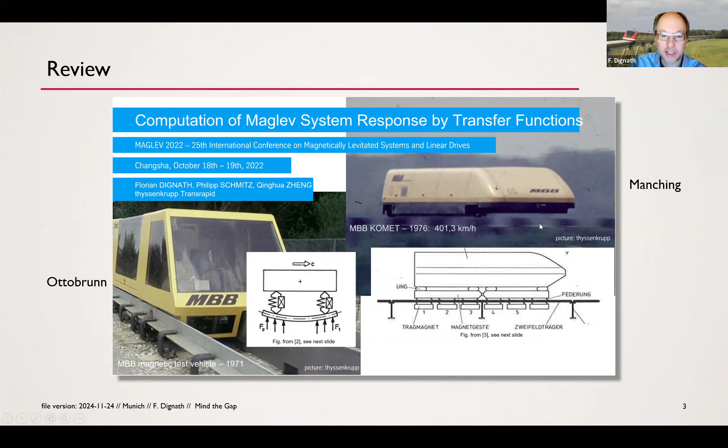So you see, in 1971 the first vehicle was levitated, and then in 76 they first reached high speeds. If you want to read more about this, I can recommend some publications. I wrote two on this slide, but in them you see many more citations. There are quite extensive publications available even nowadays where you can read how they built these systems and what difficulties they had to overcome.

You see some of the most important people from that time here. The most important person in this picture is Mrs. Gottzein, who came to MBB as an IT engineer for Mr. Bölkow and then became one of the most famous German professors, the first female to be awarded the Siemens ring, and known far beyond Germany as the mother of magnetic levitation. Professor Schiehlen was my professor in Stuttgart, and he covered the academic side of magnetic levitation. It's also in his book about vehicle dynamics.

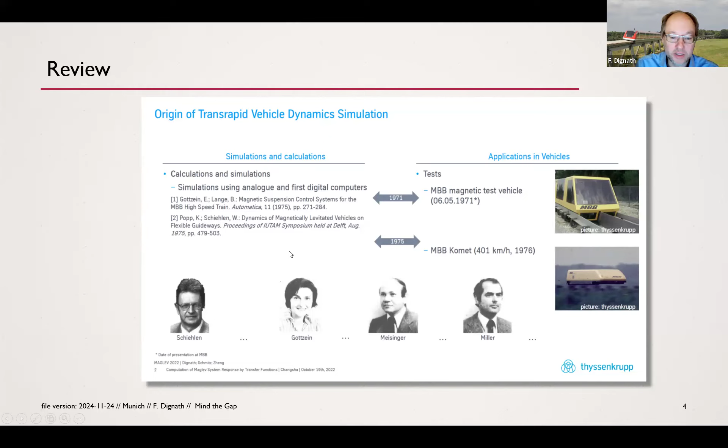Professor Meisinger used to work for Mrs. Gottzein when she was not yet professor but at MBB, and later went into the academic field at Nuremberg. So he was the link between industry and the academic world. And Mr. Miller, finally, a real industry man, was the one who made the Transrapid in Shanghai fly. You will see some publications of these persons later on.

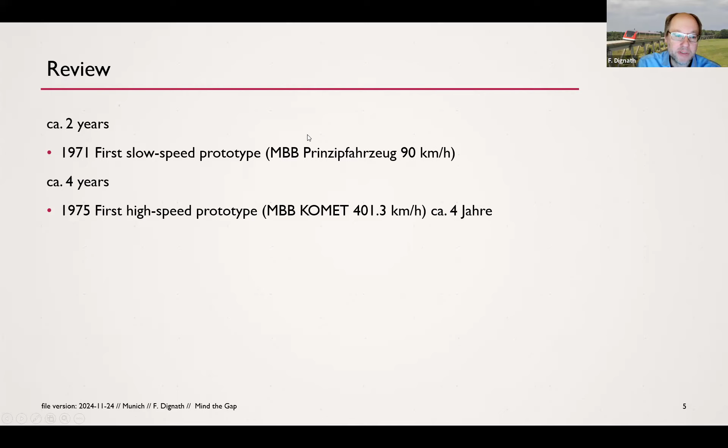So now what can we learn from magnetic levitation for the Hyperloop concepts that are being developed now? The first is the time range. The first principal vehicle took maybe 2 years to develop. I'm not exactly sure when they started at MBB, but somehow around this range. And then it took another 4 years to reach high speed. So no, even without propulsion, it was steam rockets here.

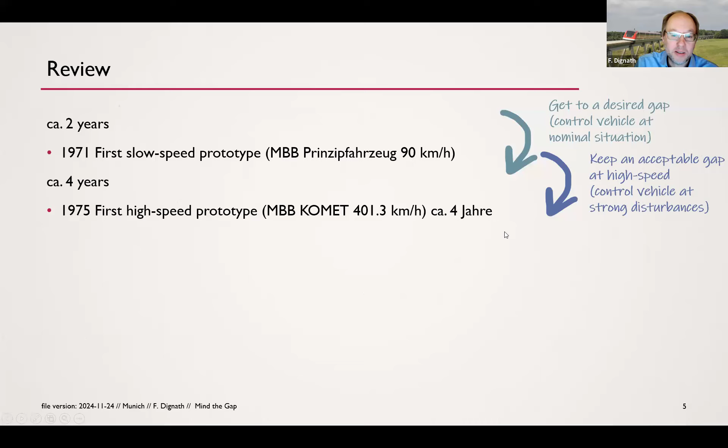So why did this take so long? The thing is, the first vehicle that only had 90 kilometers per hour just needed to levitate somehow, get somehow to a desired gap, while the next one had to control strong disturbances, get stable levitation at strong disturbances. And so this is the more difficult part to do. If you look further on, it took another 4 years until the first commercial application was happening at slow speed, and another 5 until the first passenger runs for public with high speed were conducted.

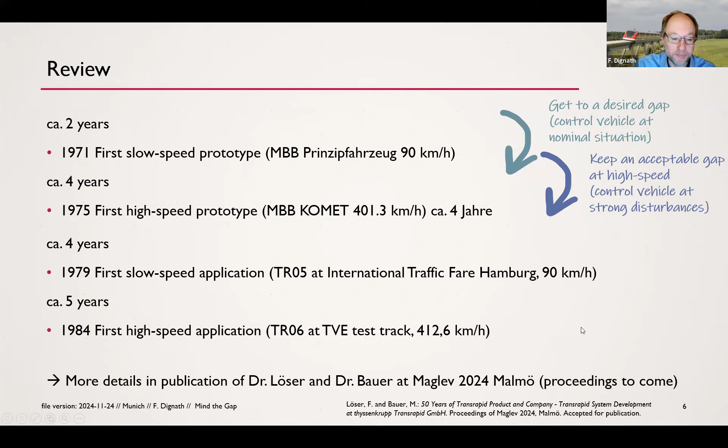You find more details about this in a presentation of Dr. Löser and Dr. Bauer, or the paper about that presentation. Unfortunately, proceedings have not yet appeared, but should appear any day now. So keep an eye open. This publication here is certainly worth reading for everyone who would want to develop a new maglev system nowadays. So this I can really recommend.

Okay, so the control task. Part 1 is just about these questions. What do we have to reach concerning these strong disturbances? Then we have to say something about a magnet we want to control, because we will see that's actually a second control task. And I will say shortly something about the control systems, but not go too much into theory of control here. And lastly, say a few words about the scenarios you have to think of.

So first, the primary control task. Sounds easy enough in the beginning. You have some reference line around your guideway. For the Transrapid, this is called the central track reference line, and you want to follow that. The line is not quite correct to say, because it's a combination of 3 coordinates along the distance of the track: the vertical, the lateral position, and also the cant angle, so the torsion around this axis here. And they are defined all along the track, depending on the track location X, and you want to follow this.

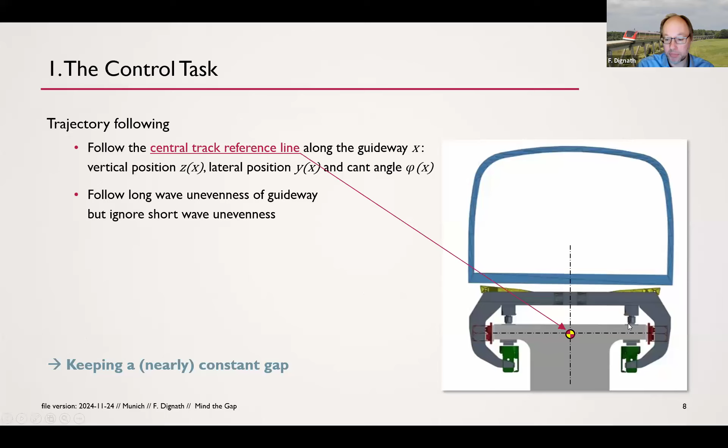You want to follow the long wave unevenness of this, but of course you want to ignore the short wave unevenness. Like for the Transrapid, we have girders of 25-meter length, and then comes the next girder. You have some steps in between and gap in between, or you have function models with stator packs or steel iron here, which are only 2 or 3 meters long, and then here comes a next step. You don't want to follow this. So that sounds easy enough. Keeping a nearly constant gap, you could say. However, if you look at it a little more closely, then you realize it's not so easy.

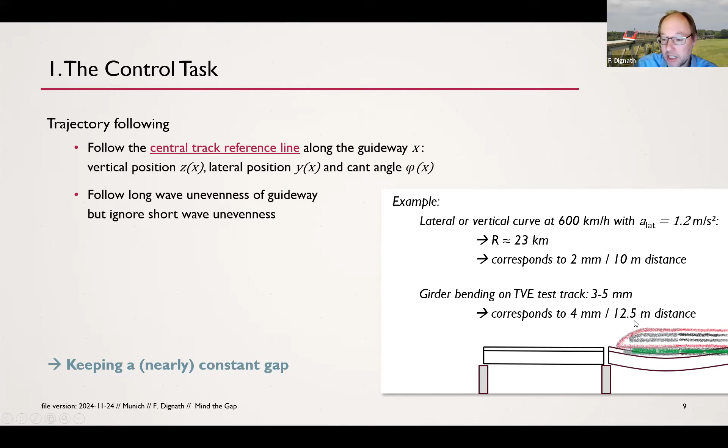Because thinking of curves at high speed, for example, 600 km per hour, at the maximum allowed lateral acceleration, you have a radius of 23 kilometers. Could be a vertical curve or a lateral curve. So this corresponds to about 2 millimeter change in 10 meter distance. If you think of the unevenness, for our Transrapid especially, on our test track, we had 3 to 5 millimeter bending of these girders. So if the vehicle runs on a girder, it bends 3 to 5 millimeters, an average 4 millimeters in 12.5 meter distance. So this short wave unevenness is actually larger than the curve you want to follow.

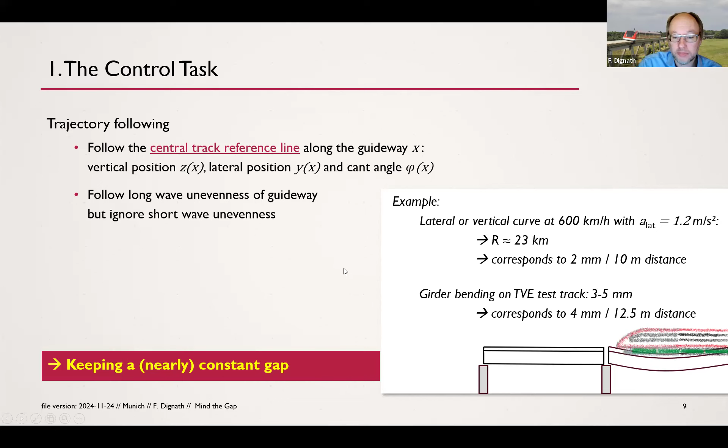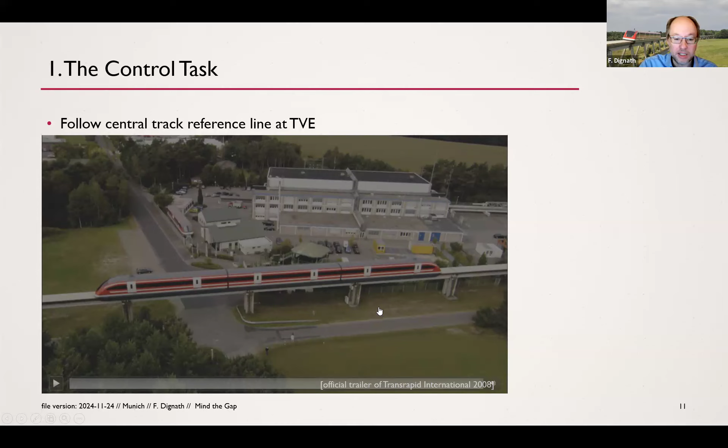So I apologize for the sound of that, and I hope you can follow.

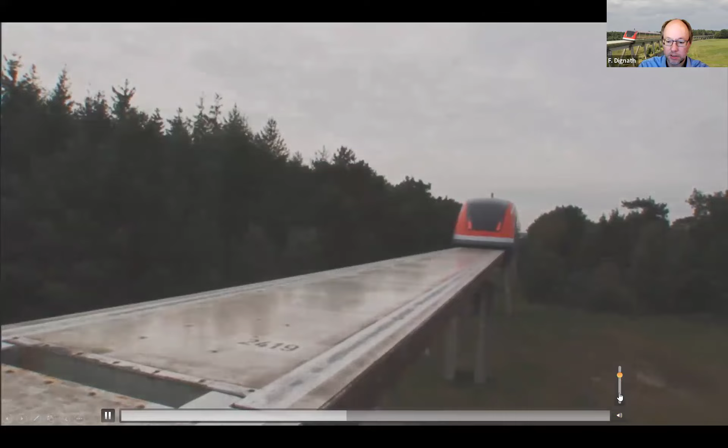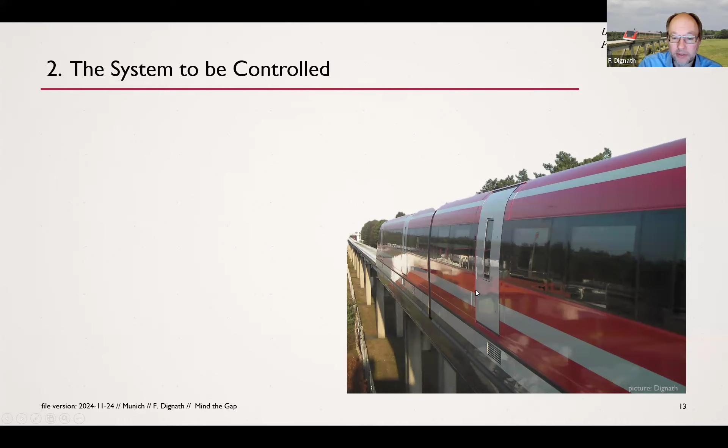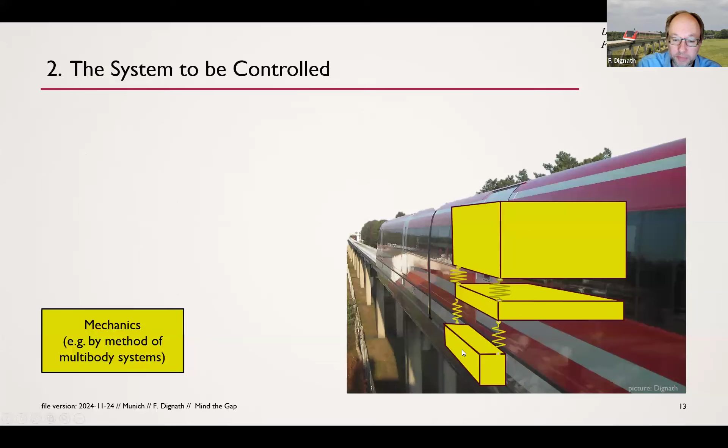And if you look at the vehicle from a vehicle dynamics point of view, as you would find in a book of Professor Schiehlen, you could say that a whole vehicle consists of 3 masses. One very large mass on top where all the passengers sit in, the car body. Then a smaller mass, which is the connection between the magnets - we call it the levitation chassis at the Transrapid - and then the magnets on it, separated by springs.

And of course, the magnet has an electromagnetic system that we need to control. So what we give is a voltage to the magnet, then some current follows from this, and from the current follows a force, and finally we move the mechanics. You all know that for the electromagnetic suspension system we are talking about here, this is inherently unstable, so we have to stabilize it.

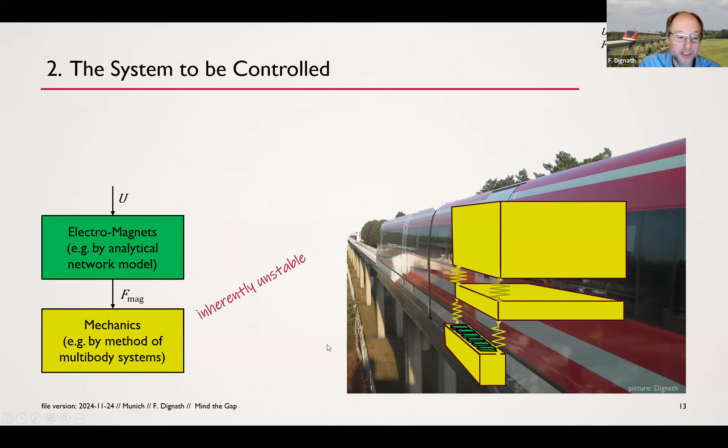But before we can stabilize it, we somehow have to get a current into the magnet. We can only apply a voltage at the ends of the electric line and need to get a current, and I would talk about this in this second topic. I said I won't go too much into control theory, but I have to show a few equations from the magnets, and I hope you're a little more familiar even with magnets than with the control theory, being Hyperloop engineers.

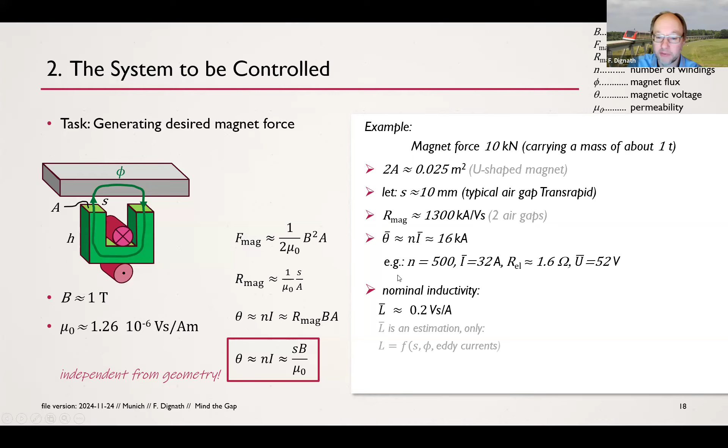I just have one example here, but of course you can choose 300 windings and 50 amperes or such like. This 30 ampere is a sensible range for typical electronic components, transistors and so on. So it shows that, and from this follows your inductivity.

Here it's 0.2 Vs/A, and that means it takes more than 0.1 seconds to get the current running once you have your voltage in there, or half a second until you are where you want to be with your current if you apply a step of the voltage. Let's say you set the voltage to the level you want in the end, you need to wait half a second.

So that's of course too slow if you want to control your magnet at these 5 Hertz we talked about in control task 1. So we have to speed this up.

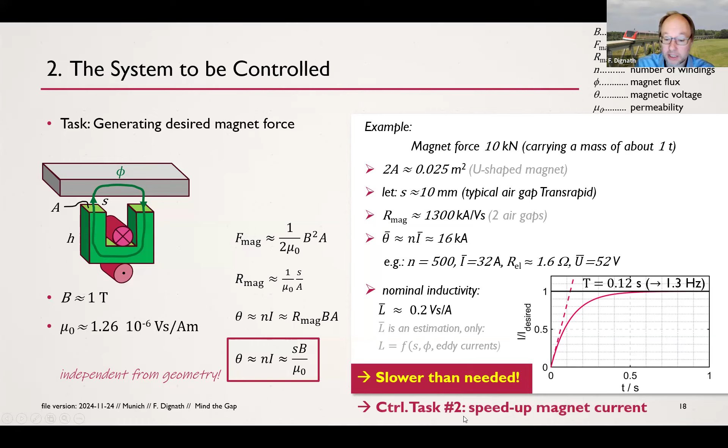You can do this by applying much higher voltage in the beginning, let's say up to here. Then your current will get up much faster, and when it's there, you put your voltage down again to the level where you want to reach. But that's a control task you have to do in addition to all the other control. So that's your second control task, speeding up the magnet current.

And I have another part of that official trailer where you see how the magnets in the Transrapid look like.

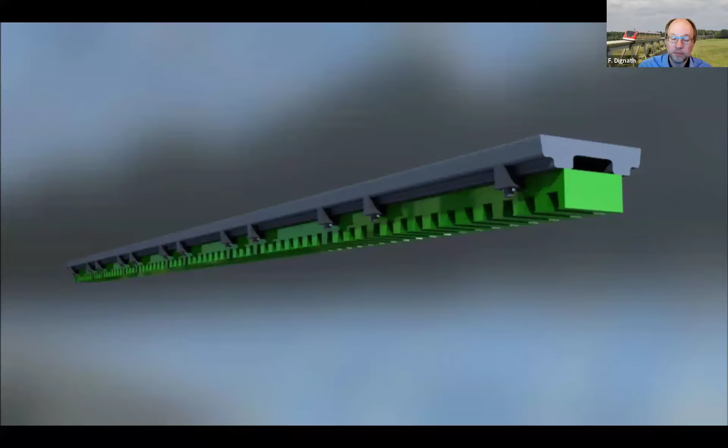So that's our stator. The green part is iron laminated. Here comes the levitation magnet with 12 poles, 12 coils. They are controlled by two control units, one for the first 6, one for the other 6. Here are already the gap sensors, so we have 2 gap sensors per control circuit for redundancy.

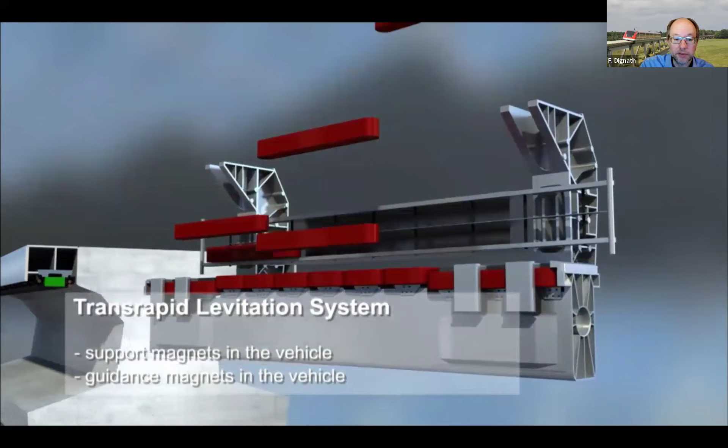And now come the guidance magnets with a little different geometry. And this we call a magnet module. We have several of them along the vehicle.

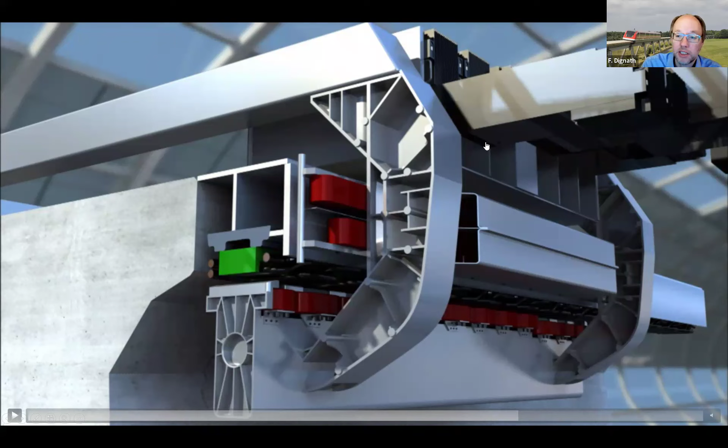Now another important thing here: we have placed all the electronics in boxes that you can simply slide in. They are automatically connected at the end by some plug and connection system. So you just have to push them in and lock them, unlock them with these grip handles, and pull them out. So you can very easily exchange them. If during a ride you see one of them fails, you can exchange it in a few minutes during maintenance.

So that is the magnet system we have to control.

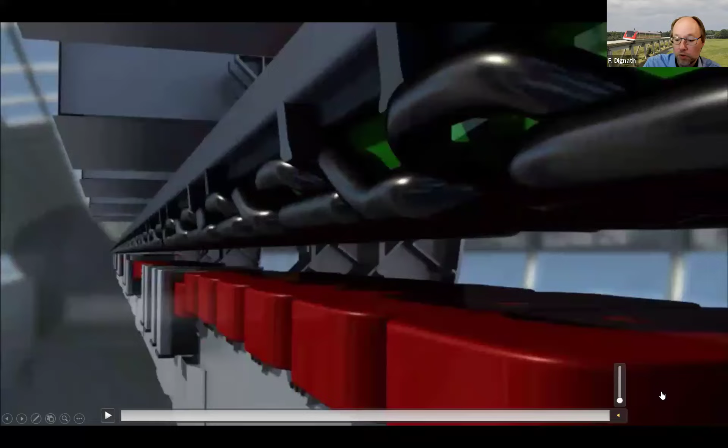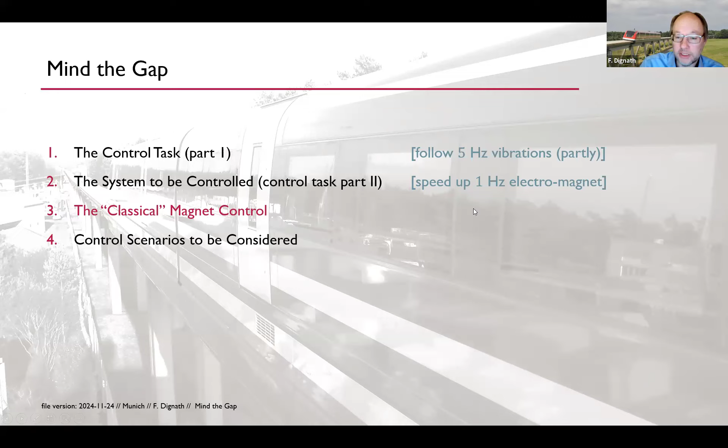That's our second task, to speed up the magnet from about 1 Hertz in this example. Of course, you may have a dynamic of your inductivity of maybe 2 Hertz or also half a Hertz, let's say. With Transrapid, we are a bit slower because we have large magnets. And you have to speed them up so that you can control the 5 Hertz vibration.

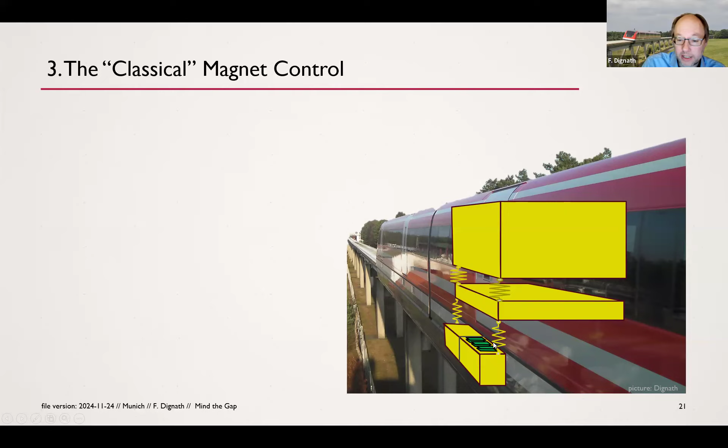Now, some words about a classical control system to do that. The first thing is, if you look at this mechanical setup, we decouple the large mass up here from our magnets down here. So with this 5 Hertz, we only have to move the magnets and not the large mass up here. Besides, passengers do not want to be moved by 5 Hertz.

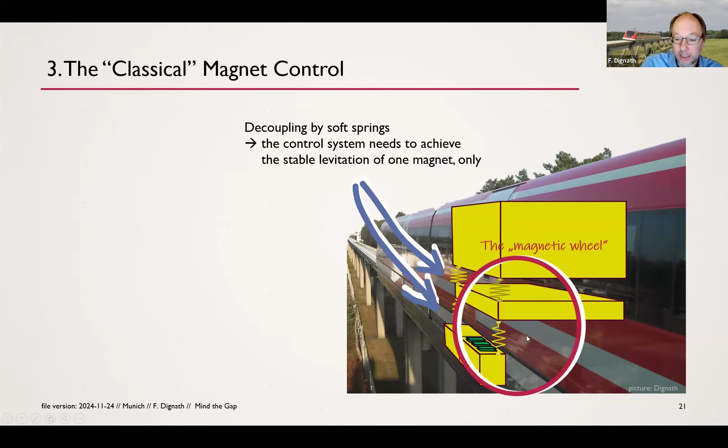So our control system only needs to control one corner of this levitation chassis here. This is actually called the magnetic wheel. That term was invented by Professor Gottzein.

So that's one part of a magnet controlling the force in one corner of our levitation chassis, and these decoupling springs here. That expression shows quite vividly what is done: we have only to look at one magnet and don't consider all the rest of the vehicle. Just like one wheel of a car rolls along the road and vibrates, jumps a little around, without caring for the rest of the car.

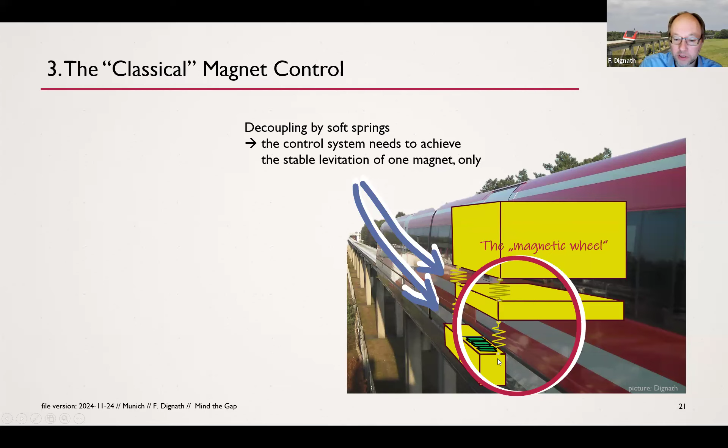And then the car just stands on soft springs on these four wheels. We don't have a control system from the car right to the rubber of the tire of a car. So we also have to consider only control of one little part, one magnet controlling one magnet part, without having any effect of all the other magnets in the system to consider.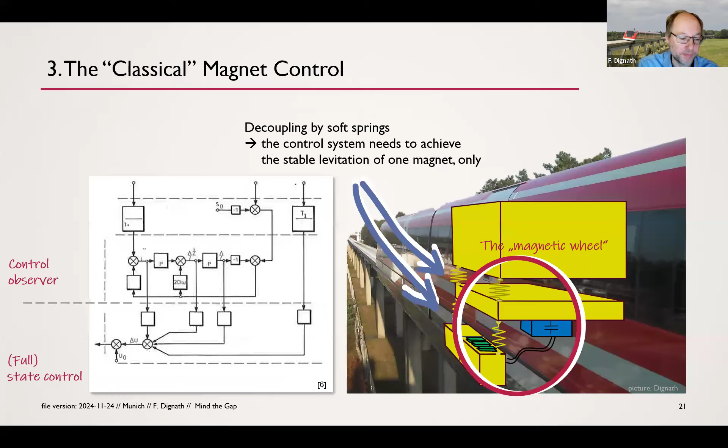The typical layout, as it's written in the famous paper about the magnetic wheel, is a state control system, full state control, combined with a Kalman filter for the observation. So we measure the air gap, we measure the acceleration, and then we have some calculation scheme that calculates all the states - the Z position of the magnet, Z dot, the change of the gap, and so on, even the flux in here. It's all calculated from these sensors of gap, acceleration, and current.

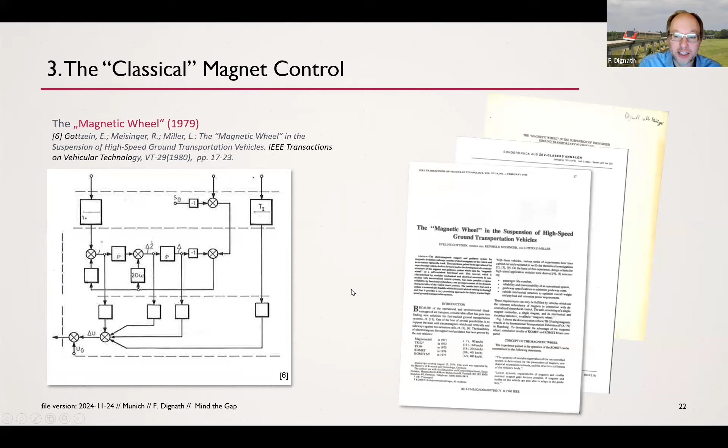I don't want to explain this in more detail, but if you are interested, you can read the famous paper here of Mr. Gottzein, Mr. Miller, and Mr. Meisinger. I am happily in the possession of an original that Professor Meisinger gave me, but you find the PDF somewhere.

So what I want to talk about is the speed that your control system has to fulfill, because you might set it up a little different than in this old paper, although it would still be possible. Transrapid is not so much different from that system published in the paper. But however you set it up, you have to consider these speeds here.

The first is, if we want to control something around 5 Hertz, that means our time constant of the system is smaller than 30 milliseconds. Time constant means if you switch on some desired gap, it must take less than 30 milliseconds until your system reaches that, or at least the magnetic force reaches that.

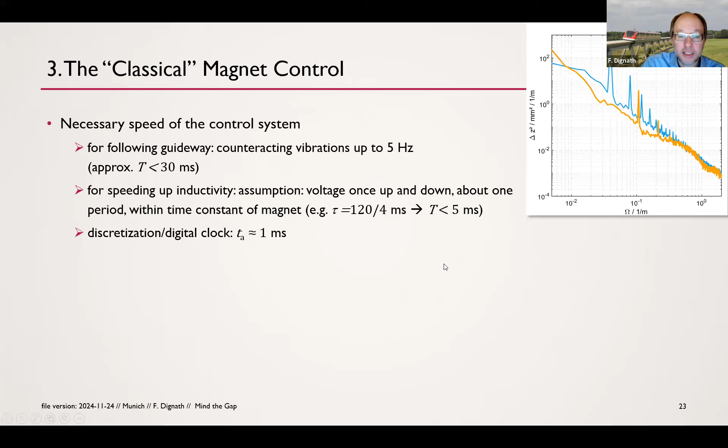So that was our first control task, coming from the unevenness. Secondly, we have to speed up the magnet. In our example, we said we have 120 milliseconds until the current is where we want it to be - that corresponds to about 1.3 Hertz, about 4 times too slow. So let's speed this up by a factor of 4, giving us a period length of 30 milliseconds instead of 120.

We want to get the voltage very high until the current reaches what we want, then set the voltage down - that's a whole period of the voltage. This whole period is about 30 milliseconds after we've sped up by a factor of 4. So if the period is 30 milliseconds, the time constant for our voltage setting is smaller than 5 milliseconds. So if we want to control something with a time constant of 5 milliseconds, our digital hardware, our digital clock, needs to be somewhere in the range of 1 millisecond, maybe even better, half a millisecond.

So this is some requirement for your control system where you do not have to consider very many details of your setup. It just follows from the general control task.

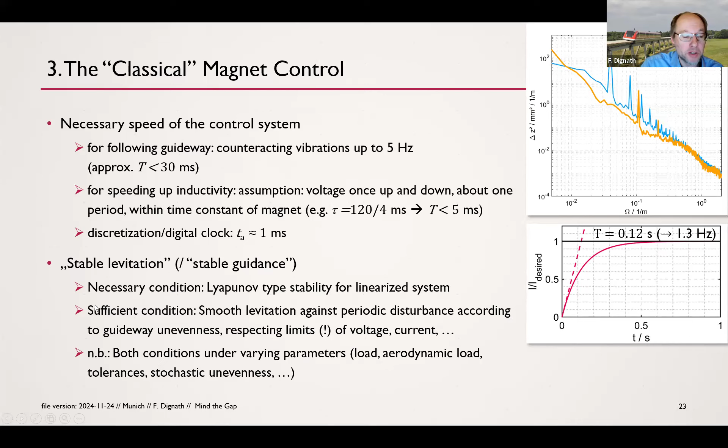So that's what engineers typically would call stable levitation. Although if you have a control engineer in your round, they will disagree and say stability is clearly mathematically defined, and it's this one here. So there's also a lot of discussion if you have control engineers and non-control engineers talking about stability. But after my experience, most engineers call this a stable levitation only if all this is fulfilled here.

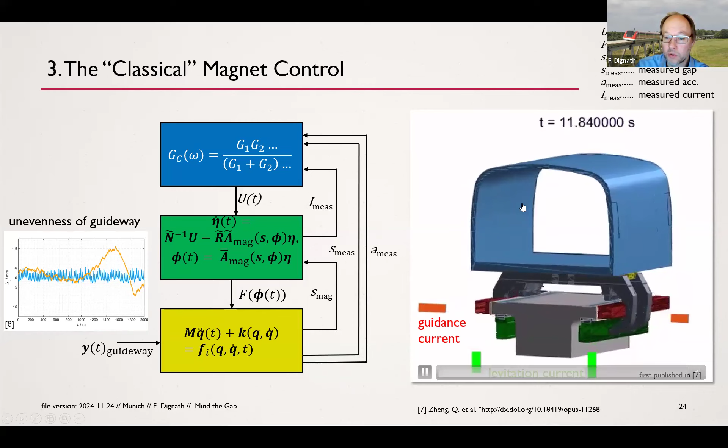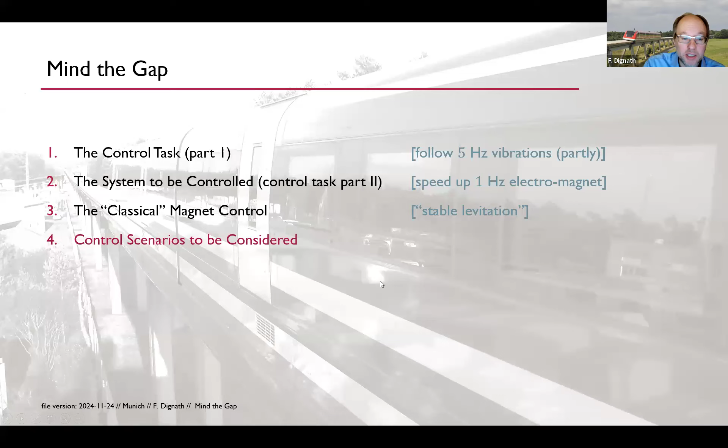Here you see the currents, by the way. You see how the currents have to react very fast, although your passengers should not move fast. So much about a classical control and the term stable levitation, maybe. Lastly, a few thoughts on the situations you have to consider additionally. So the first one is the nominal situation. So that's our control task 1 and 2, which we fulfill by the classical control.

Secondly, you have to control your start of levitation and settling down. This might seem very similar, but usually you have a much larger gap here because all the elasticities in your system need to be coped before anything lifts off. For the Transrapid, for example, we have here this 10 millimeter nominal gap, but if we settle down on our skids, we have a 30 or 40 millimeter gap. And for the first 10 millimeters of magnet moving up, nothing happens up at the vehicle, it's still on the skids. So here it's a completely different trajectory.

Thirdly, you might have to have the start of levitation even during your ride. If for some failure scenario your control system has switched off, or failure detection system has switched your control unit off, you might want to restart it so you don't have to drive for the next 300 kilometers without this control unit. At least try a reboot. And so you have to lift off at very high speed, possibly unknown speed.

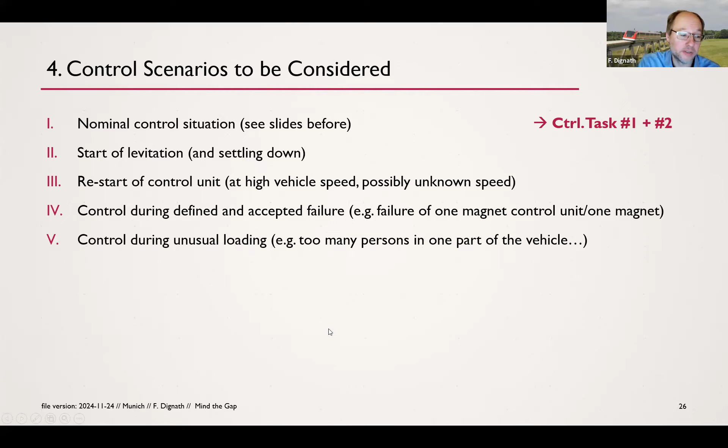You, of course, usually only have one pod, but even here, something may happen at one side of the pod that people panic and all run to one side of the pod, pressed together in one side of the pod. So that magnets in that corner suddenly have twice the load. And you have a completely different center of gravity and so on. So I put this as 5.

And now I would call this a robust levitation and guidance. Everything I said here concerns guidance as well as levitation. Guidance really is very similar. I would call this a robust levitation if you have what we in practical language call stable levitation before, but not only for case 1, but at least these 5 scenarios.

You might find even some more scenarios if we think about it. So that's my own definition, I have to say, because robust stability in control engineering, again, is very clearly mathematical. It's something similar but a little different to here. So I call this robust levitation, not robust stability of a control loop or something.

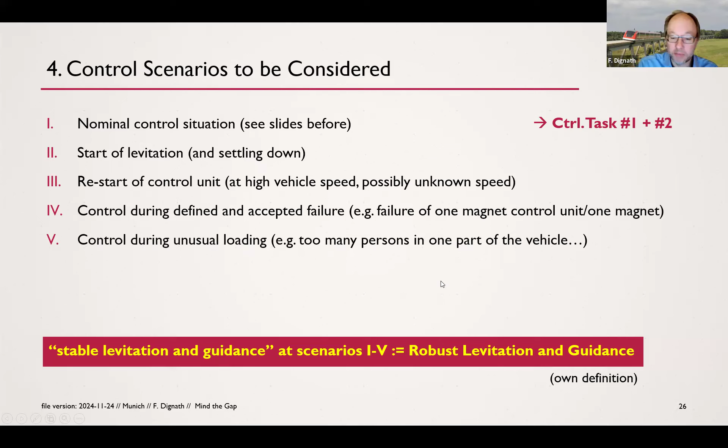Now, I won't go through everything on this slide in detail, just want to mention there is a method of systems engineering, how you can find these 5 scenarios I've just talked about. Because if you think about these 5 points and what could happen in your system that fits to one of these 5 scenarios, there's quite an unoverviewable number of scenarios you can think of. And systems engineering has some very systematic methods of finding all of these scenarios, not forgetting any, with reliability, availability, maintainability, and safety to consider one after the other.

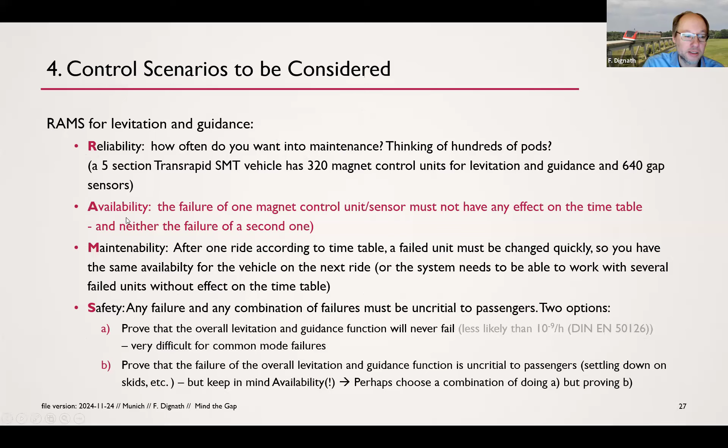Right. And I just want to stress availability is what it all boils down to in the end, once safety, of course, is fulfilled. And this really makes the difference between a system just for demonstration and commercial applicability. You see this at German Rail at the moment. They have nice ICE trains running 300 kilometers per hour, which is not so bad for most distances. But now if you have a ticket, you have to plan that it takes maybe 1 or 2 hours more. So that's not at all the same system. And the reason is that at the moment, at least German Rail does not have a good availability.

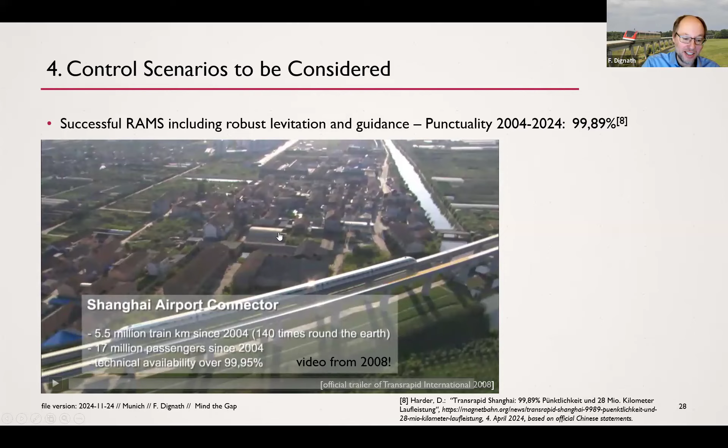If you have a good availability, that means even if things fail, your passengers are still traveling on the planned timetable. Then you get something like our system in Shanghai. And allow me to show one more advertisement video from 2008 about that system. So if you have that availability, then you can also reach a punctuality that your passengers will like.

And that's my last slide. Very roughly summed up everything here, although the whole thing is a summary. We have to follow some unevenness of the guideway, let's say somewhere below 5 Hertz. Above that, you want to ignore, and you have to follow everything under maybe 1 Hertz really directly. So that's your central track reference line. For doing that, you have to speed up your electromagnetic system first. So that's really a second control task your system has to fulfill.

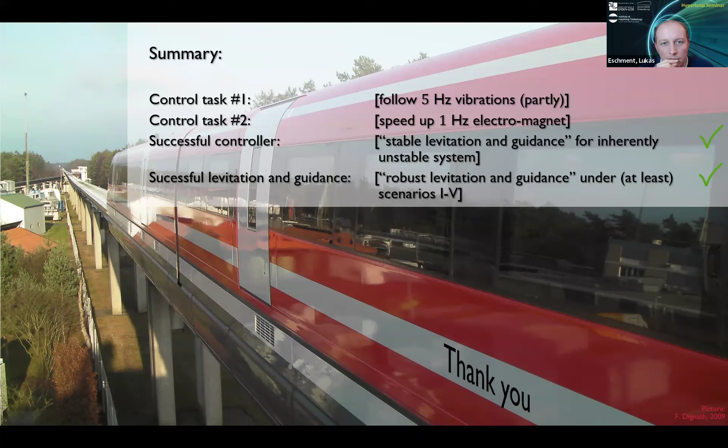Yes, that one. Well, let's say I built some example guideway in our simulation software, and I assumed that you do not have every 25 meters a pillar as you are in the tunnel, but you will have some functional modules that are set up at a certain repeating distance. And here I took a distance of 9 meters because the company Max Bögl has built such small girders on the test track in Emsland and tested successfully.

Okay, that's just a perfect question following that up. Do you think that repeating structures in the tube need to be avoided because of the maybe aerodynamically induced periodic disturbance that it creates to a vehicle, for example?

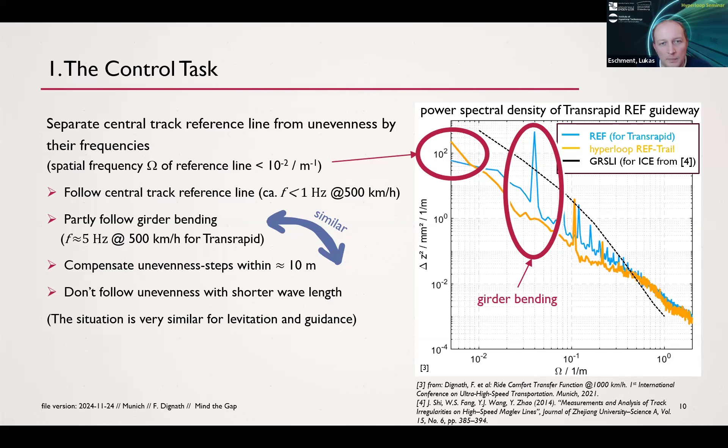Well, maybe I can stop this here so we can see each other better.

In principle, of course, it's good if you have as little unevenness as possible and as little repeating unevenness, especially. So if you're in a tunnel, you have, of course, a much better chance than if you're up here on some girders above the land. And I would very much recommend to use that. I think it's not perfectly to be avoided. You will have some repeating sequence unless you build every part of your guideway differently.

And you want to have something coming out of the factory at reasonable costs, so that will always have the same length, and you have fixations on your guideway. You could try to play around with that to have your fixations not at the same intervals, but maybe changing intervals. It's something we do at our magnet poles, actually. There we don't have the magnet poles all in exactly the right periodicity, so to speak. But you will have some repeating things, certainly.